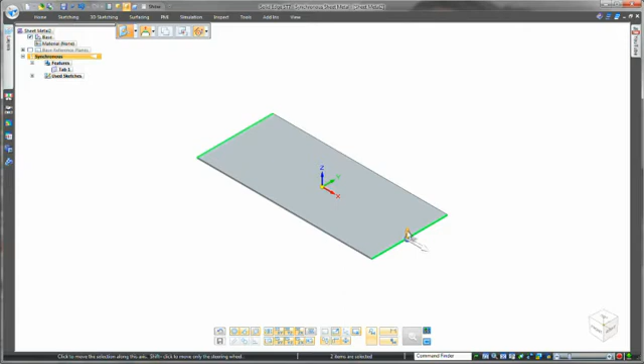Starting from a blank space, we'll sketch a rectangle roughly the size we want and pull that into a sheet metal gauge. For a couple of flanges at either end, we can simply pull these out too. Let's do the same thing again to add a couple more flanges.

All the time, watch how we're working with our geometry rather than clicking through commands. Design is the focus here, not the software. Oh, and the design here should be for these flanges to angle out.

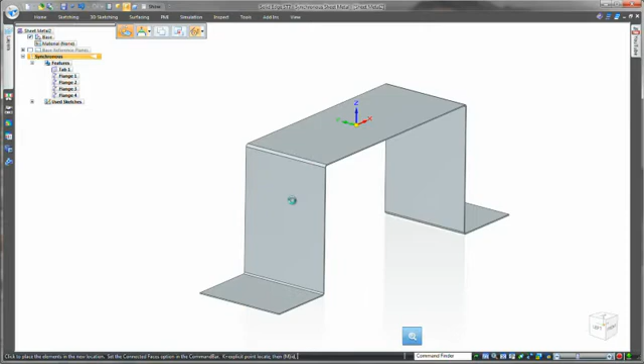No need for delete or undo. We can use what we call the steering wheel, our main control in synchronous technology, to angle. But not both sides, I don't think. No problem, we'll just tell these faces to be at right angles.

Just because we created these symmetrically doesn't mean there's history-based design intent tying us down, like you get in most any other CAD system. Easy.

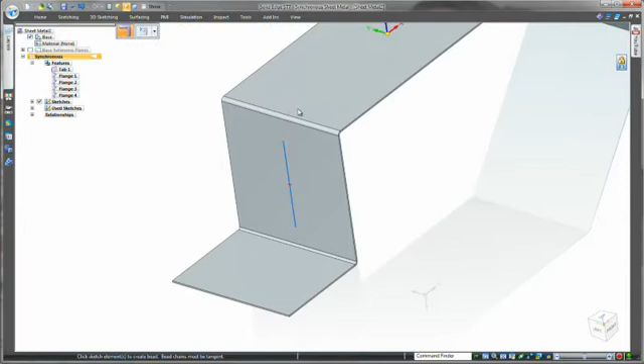Okay, next up we need a guide for the USB block that this spring clip will hold. A bead would be ideal, and that's as easy as sketching a line where we want it to be, and then choose the size and shape of our bead. This one I used in a previous project should work just fine.

Next, let's create a cutout to go through all three sections of the sheet metal on the right hand side. Oh, and check out this method as an even quicker way of sketching shapes.

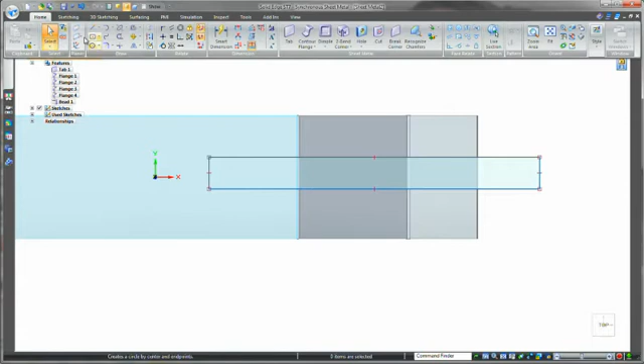Nice. We'll centre that up, and although this is a concept, I do know this needs to be 16mm in width, so we'll tie that down.

Another simple drag, this time to remove material, but we want this cut to be created before the part is bent into shape. No problem, Solid Edge can flatten the part on the fly before cutting.

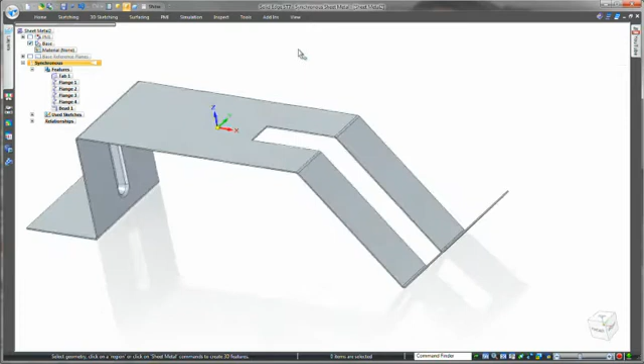Very nice. For the retaining clip that we need, let's drag out a couple of flanges here and angle them both in. Same process as before, pull to create, and then the steering wheel to angle.

We also need a sidewall to contain the connector block, so let's add another flange. But the material needs to be on the inside, and a partial flange, not a full one. Great!

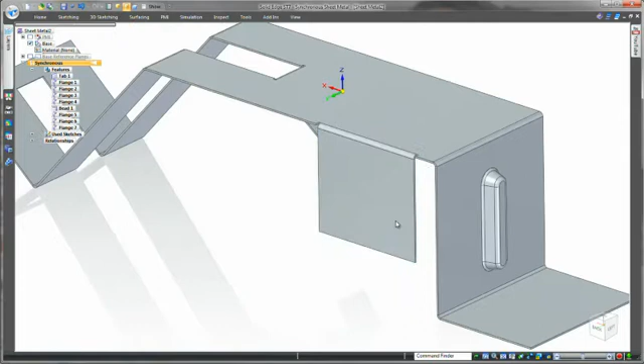Along with the USB block, this spring clip needs to clamp a fuse holder. We'll pull out another partial flange, and then let's mirror this across to the other side.

Oh no, we've made a big mistake. The design brief clearly stated that this top sheet metal piece needs to be angled. I completely forgot. Remember that this was the first piece of geometry that we created. Everything else is built on this.

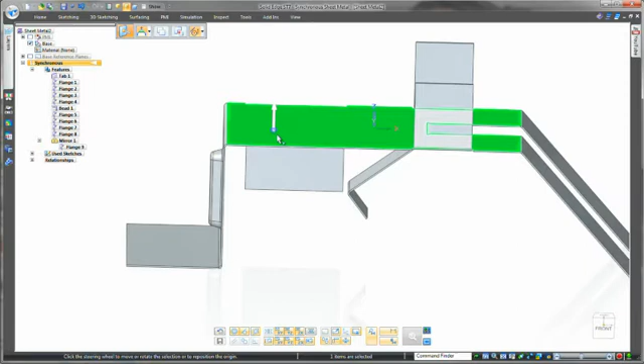But also remember we're using Solid Edge with synchronous technology. Check this out. Steering wheel to the rescue, simple rotate, no drama. Let's get back to working on the clamp for the fuse holder.

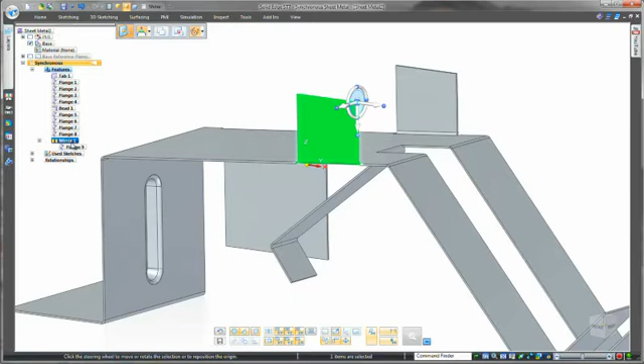Remember we mirrored this, and notice along with everything else, this has been added to a feature tree. Yes, it's direct modelling, but there are still features to work with, like in history-based CAD. The best of both worlds with synchronous technology.

That means we can edit the feature, breaking the link so that we can work independently on one side. And now we can add the jog that we want on this flange. Same process as the bead here, just a simple sketch line, and then apply the jog.

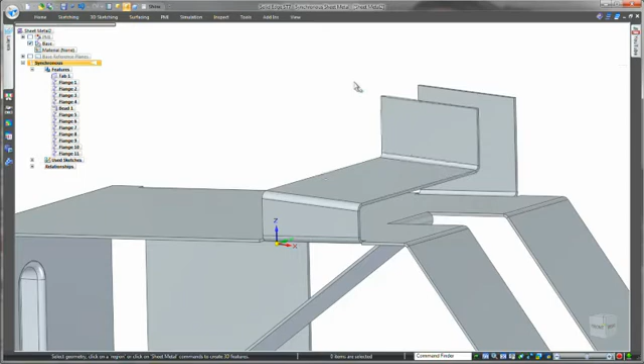Let's do the same for our retaining clip. Again, same process, simple sketch line where we want this jog to be, and then apply that jog, dragging it out into position. Easy.

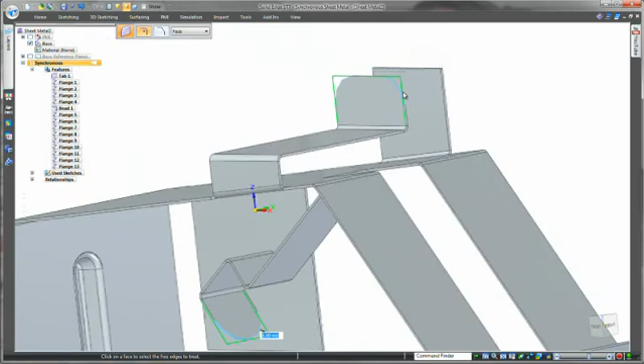Finishing up on our concept, let's get rid of some sharp edges by breaking corners. Nice and quick, click and go.

And finally, we were briefed to include a hook to mount the whole spring clip. For this, let's push in the width of that second flange we created. And let me just repeat that, the second flange we created. No need to worry about the order that this was modelled, we're free to make this change.

And then let's use a hem to create the hook. Choose the right size, and done.

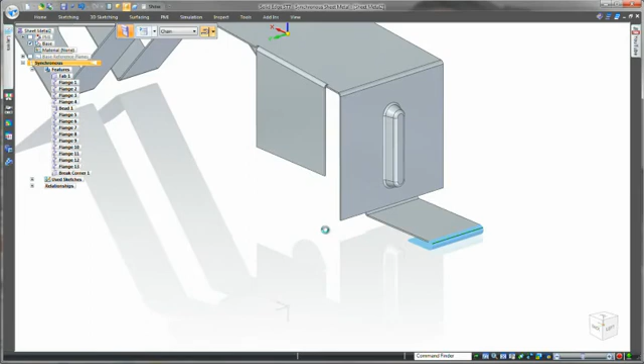So in a short amount of time, we were able to throw down this pretty complex design, working directly with the geometry rather than in and out of multiple CAD commands. And that's how it should be, no? Design the focus, not the software.

And you'll be happy to know that even if you don't create sheet metal components like we had here, you'll still enjoy the same rapid workflow. Minimal sketching, minimal mouse travel, easy push and pull modelling, and importantly, no need to worry about what order should I do this in. The flexibility to change your mind at any time.

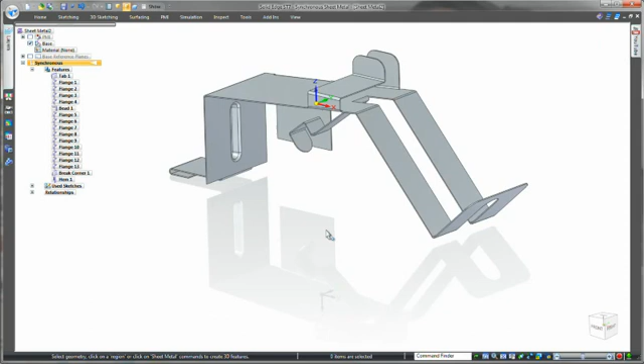That's synchronous technology in Solid Edge. Designed better.